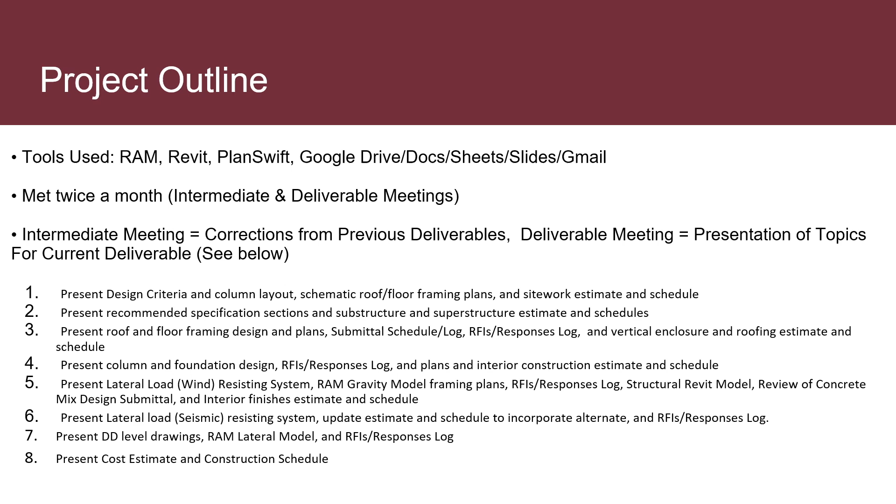Lastly, deliverable 8 consisted of us presenting our cost estimate and construction schedules.

Moving forward, our initial project phases required us to review the given climate summary and design criteria, which provided us with essential information such as various loads, internal pressures, wind speeds, seismic design categories, and a multitude of other factors that must be considered when designing structures such as these.

We reviewed the preliminary drawings we were given, and that helped us develop our initial schematic designs of the roof and floor framing plans and the preliminary foundation system for our respective projects.

Below you'll see some of the things we had to take into account when designing our buildings. This is actually from my team 2, for the hospital in Minnesota. This is a climate summary and a chart of the average high and low temperatures in Minnesota.

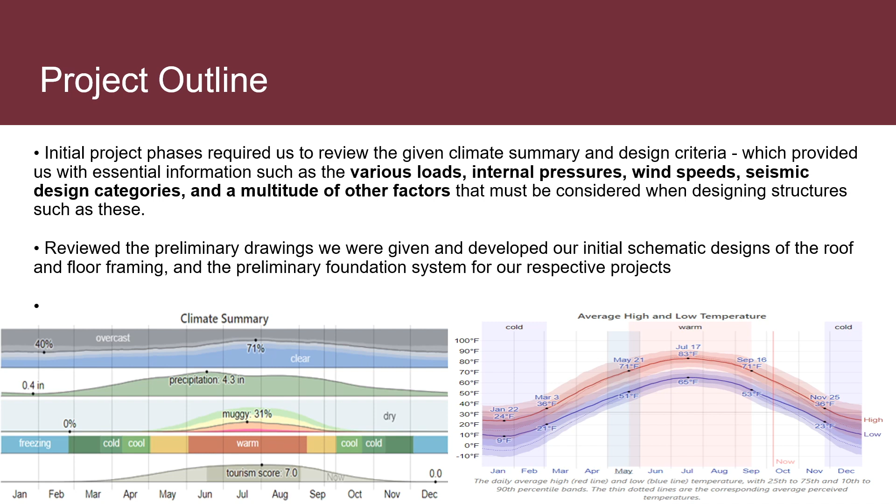This is just a continuation of some of the tasks that we had to keep up with for this project. This included things like RFIs and submittals.

So what an RFI is, it's just an acronym for request for information. It was essentially a tool we used to get clarification on certain aspects of our projects. For example, we might have needed to know how thick we needed to design a slab, or how the thickness changed depending on what floor we were on. We would have to submit an RFI for information like that.

Next, we developed our base and eventually our alternate project estimates and schedules. We then provided our structural steel specifications and our calculations for the roof and floor structural steel sections and our structural columns and footings, which were adjusted as needed throughout the entire project.

We then provided lateral framing and main wind force resisting system, or MWFRS, calculations, and designed our 3D RAM and Revit models, with our seismic force resisting system selection being last.

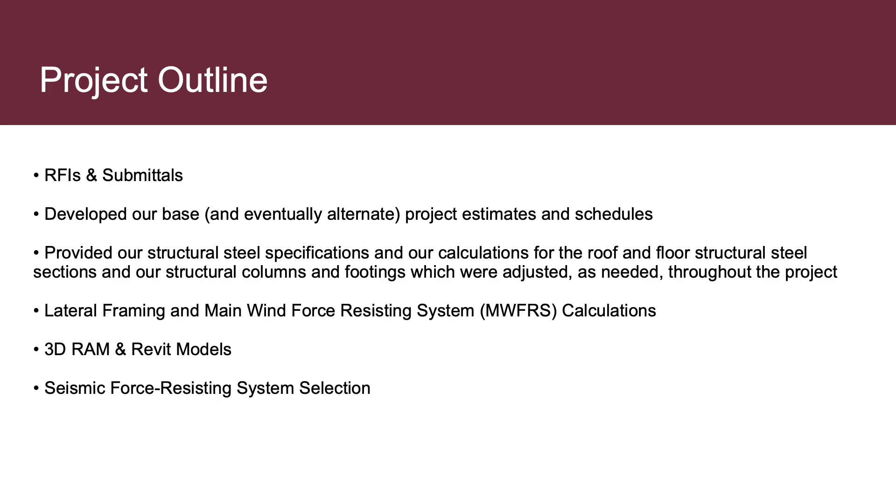Right off the bat, you're going to notice the dead loads. Minnesota has a significantly higher dead load than the rest. It's based on the snow load and the wind exposure of where the building is. Missouri obviously isn't going to have a whole bunch of snow, so the dead load for the floor and roof isn't going to be as much.

You can see the snow load corresponds with where the building is and how much snow they're going to receive per year. Corresponding with the snow load is going to be the snow exposure factor. This is based on if the structure is sheltered or fully exposed, and none of these are sheltered, so they're going to have a 0.9.

Depending on what's going on in the building, this is going to affect the floor live loads. You're going to have a lot of movement going on in an elementary school and an office as opposed to a college classroom. Then the roof live load - everybody chose 20 PSF because that's the minimal requirement for the building.

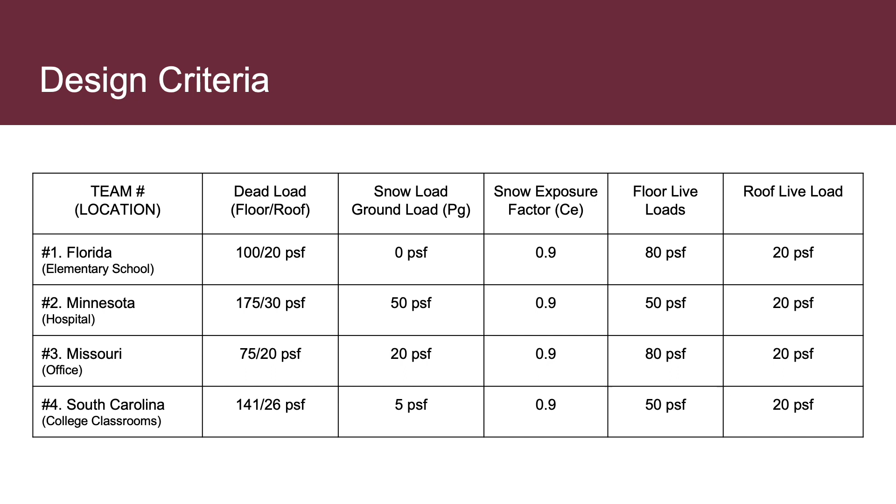Next, we'll get into ultimate wind speed. Based on where the building is, it's going to depend on your wind speed. Florida is obviously going to have a very high one during hurricane season. Same for South Carolina. Minnesota and Missouri are going to have a moderate speed based on snow and blizzard factors. The terrain exposure - everybody's going to have a Category C, very open terrain.

The seismic importance factor is based on the risk category. Risk Category 1 is not a very high occupancy; Risk Categories 3 and 4, with 3 being high occupancy for the elementary school, so they're going to have a 1.25, and Minnesota being a hospital, that's an essential facility, so they get the highest.

And then lastly, we're getting into seismic design category, A through D. A being minimal ground shaking, B being moderate, C being moderate to severe, and D obviously being severe ground shaking due to earthquakes.

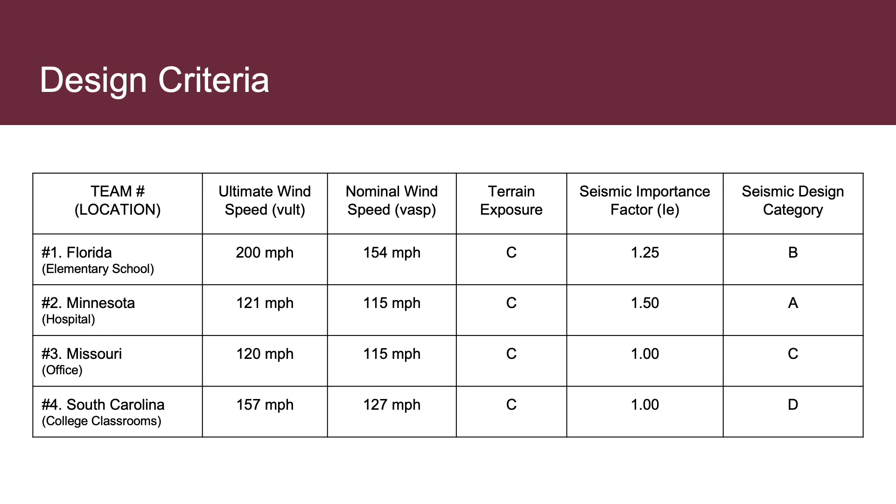So now we're going to talk about beam design. For the beam design, what was required was to know the shear capacity and moment capacity of the beams. Moment of inertia was also checked to prevent exceeding deflection limits.

The maximum deflection limits were determined for the dead and live load combined by taking the length of the beam divided by 240, and for the live load, the length of the beam divided by 360.

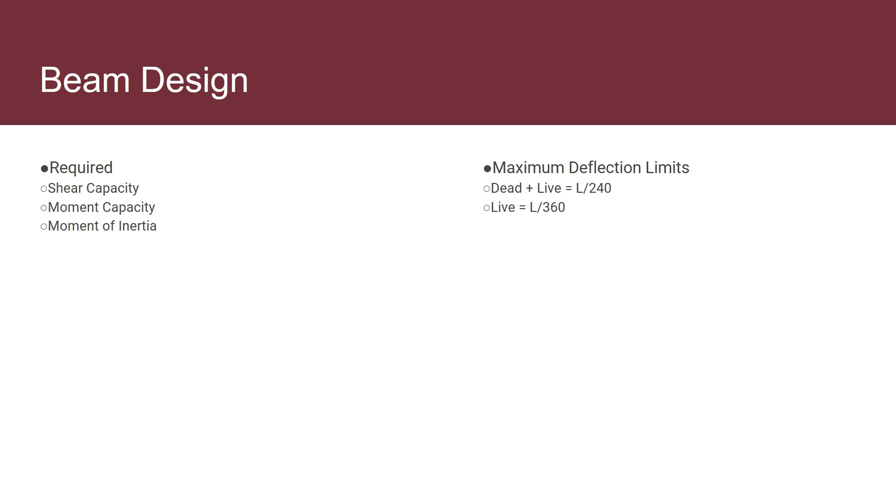These are the applied loads. Obviously, they range a bit, with Minnesota having the highest floor dead load of 175, with Missouri being the lowest floor dead load of 75. The live loads range from 50 to 80, rotating between the locations.

These floor loads were different based on what the building is used for. Minnesota was a hospital, Missouri was an office building, so obviously those vary greatly in the dead load, with hospitals having lots of heavy equipment and office buildings not having such heavy equipment.

South Carolina and Florida: Florida was used for an elementary school, South Carolina for college classrooms. Obviously they're going to be a little higher than just an office building, with lots more people and furniture. Live loads vary greatly as well.

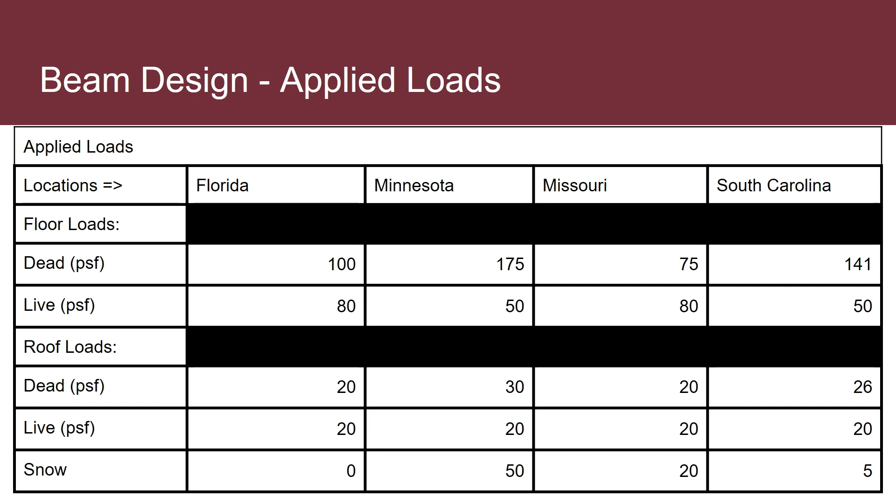For the roof loads, they range from 20 to 30 for both the dead and live loads. For the geographical locations, the snow loads vary a lot. Obviously, you're not going to have snow in Florida, and rarely, if ever, in South Carolina. So Missouri and Minnesota really only have the applicable snow loads that would affect the design at all.

So for the beam design, we took those applied loads and applied them to the schematic designs. Earlier in the design process, each group was told to design the building and do a rough layout, laying out bays, girders, and beams.

Most of us used the plans and just took a pen and drew over them. But these bays varied in size, so the girders and beams were different for each group, and the lengths changed a bit. It really all depended on what that group felt was best for their location. But these differences affect the types of steel that we have.

So the applied loads and schematic designs were used to come up with the moment capacity and the shear capacity. These numbers were taken to the AISC steel manual, where they were compared to the list of beams in the tables, and we chose the most economical steel member for our building, or each group did for theirs.

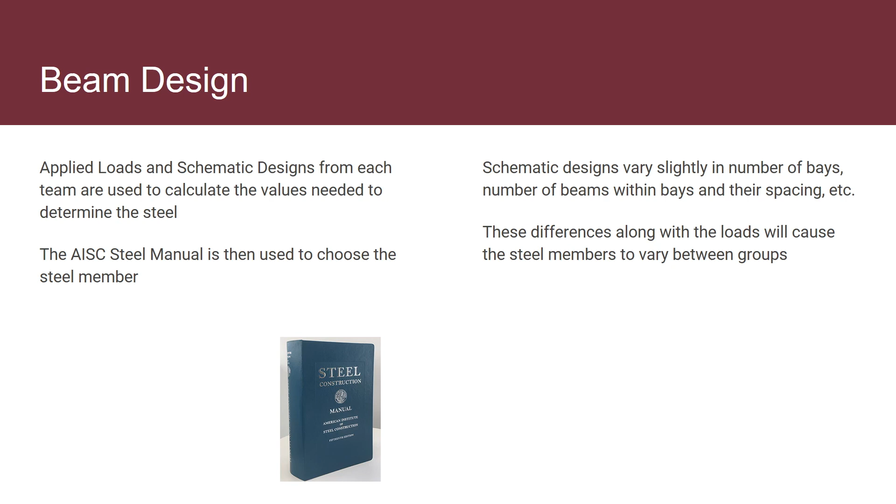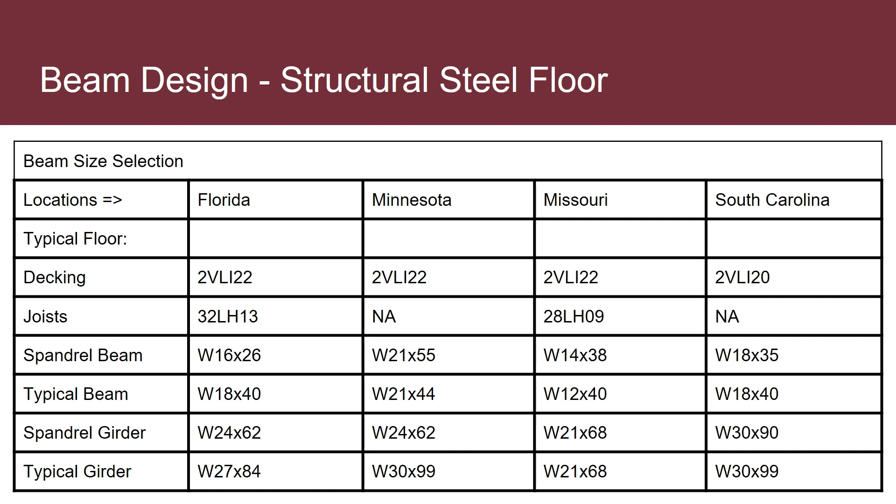And these were all the finalized steel members. They were run against a RAM model, which we'll discuss later, but the RAM model either confirmed or denied our calculations for our steel. If they did happen to vary, hand calculations were redone and retested with the RAM model until the lateral and gravity models passed and approved of our steel choices. But these were the final steel options.

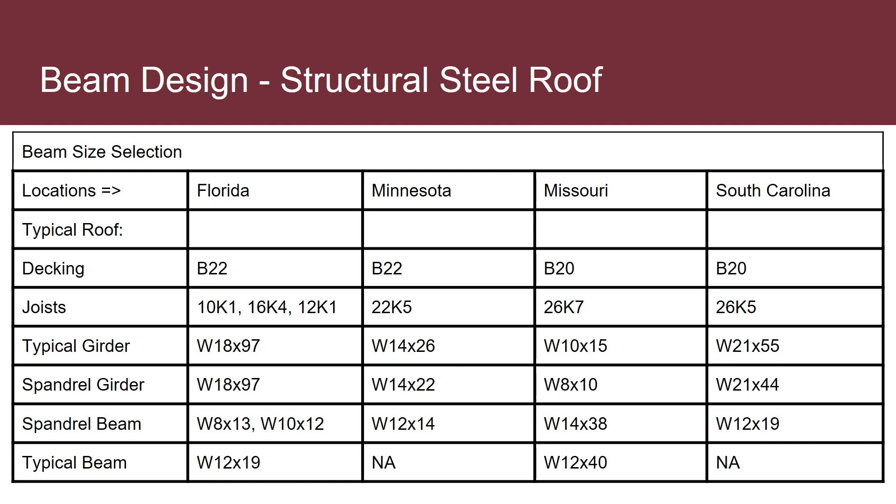Column design basically depends on column loading, and that is based on dead and live loads, and dead and live loads could differ with the building used. In our case, we got 4 types of buildings.

It's elementary school, hospital, offices, and college classrooms. When talking about the axial loading, it includes floor, roof, and wall loads. Determination of column sizes depends on maximum loading that occurs in the column. And when doing column splice, it basically depends on the strength and the cross-sectional area of the steel.

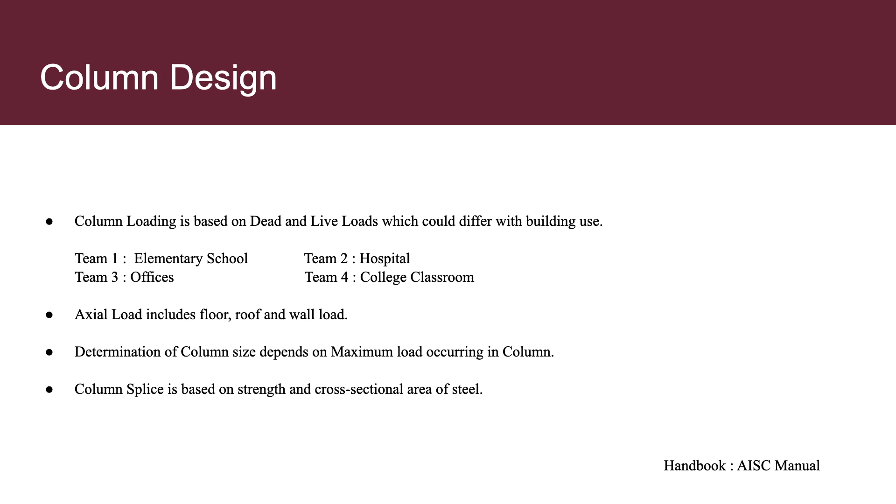What is a column splice? The column splice is basically joining of 2 parts of a column, so the forces and the moments could be transferred from one part to another. We'll be using 2 terms in the last table: top and bottom. When we say top, it means the section above the splice, and when we say bottom, it means the section below the splice. Here is a picture of the splice.

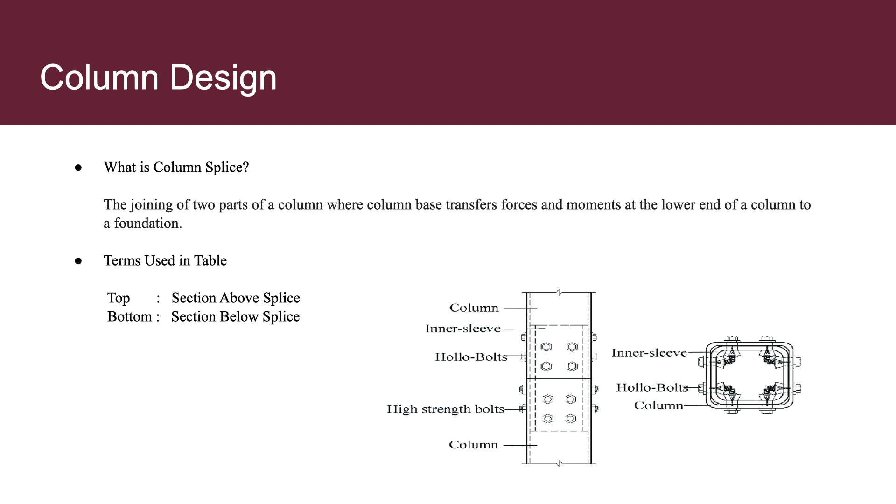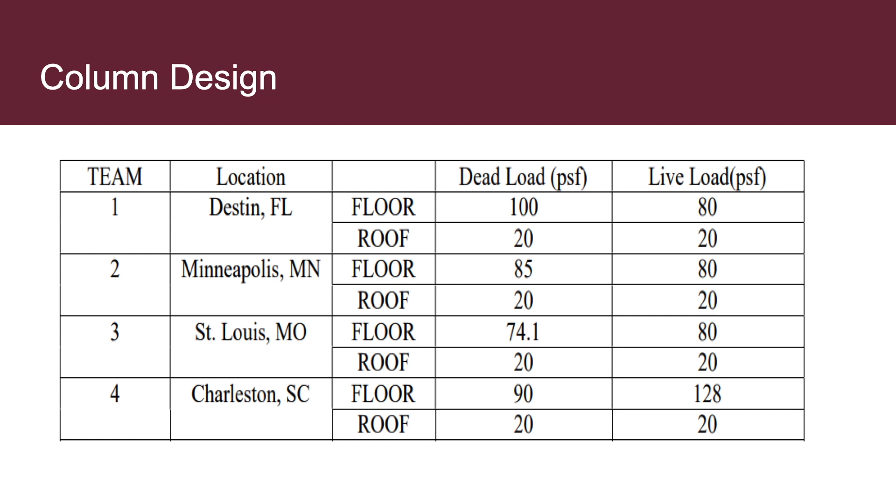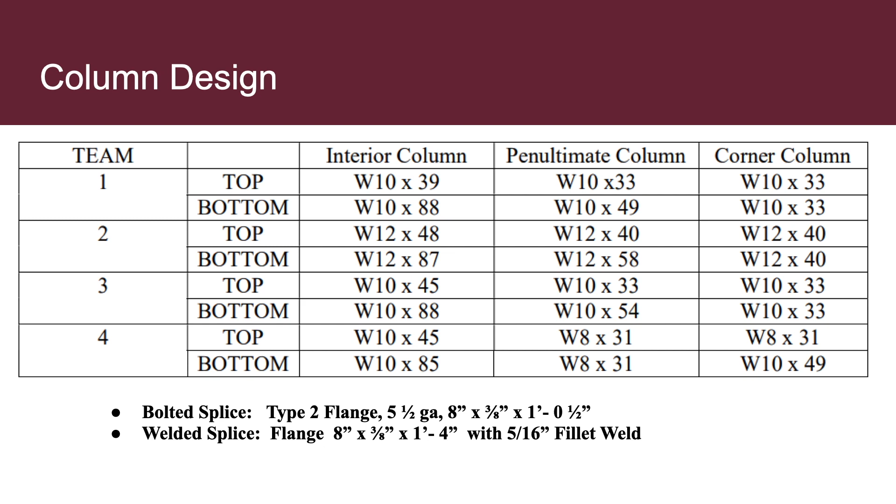Here we got a table that shows us interior, penultimate, and corner size of the column for top and bottom both. And at the bottom we got the size of splices, both bolted and welded.

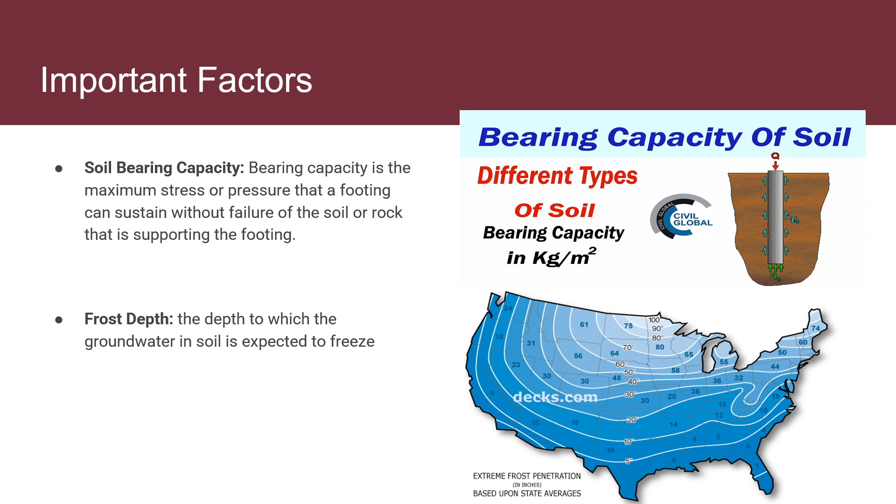If we look over here to our right, we can see that the locations in the southern part of the United States, such as our Florida location and the South Carolina one, are going to have a much lower or much shallower frost depth than, say, the location in Minnesota.

When we look at these 2 factors and compare our results, you can see that Minnesota, which has the strongest soil bearing capacity and the most deep frost depth, is going to have the smallest area when we look at our foundation size. In conjunction with that, South Carolina, having the weakest soil and the most shallow frost depth, is going to have the largest area.

Next, we will cover lateral wind design.

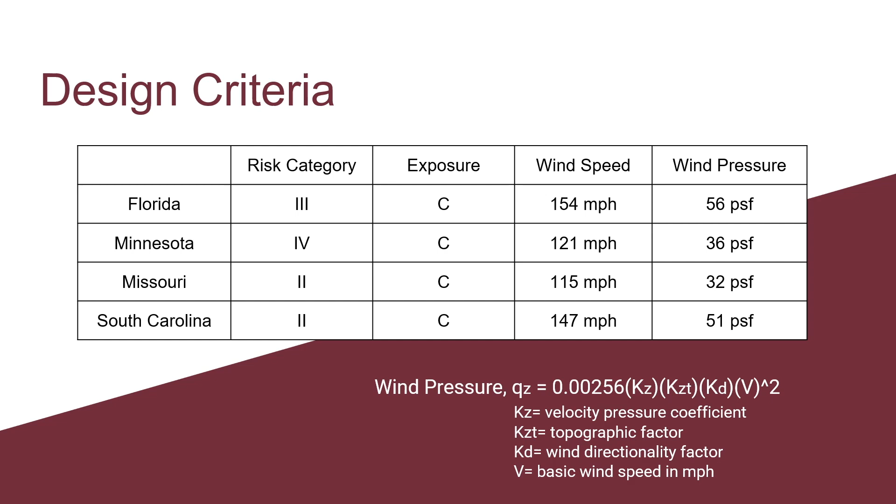With equation 28.3-1, we were able to calculate the wind pressure of the building. Then we used table 28.2-1, which provided a step-by-step procedure to determine the wind load of the building.

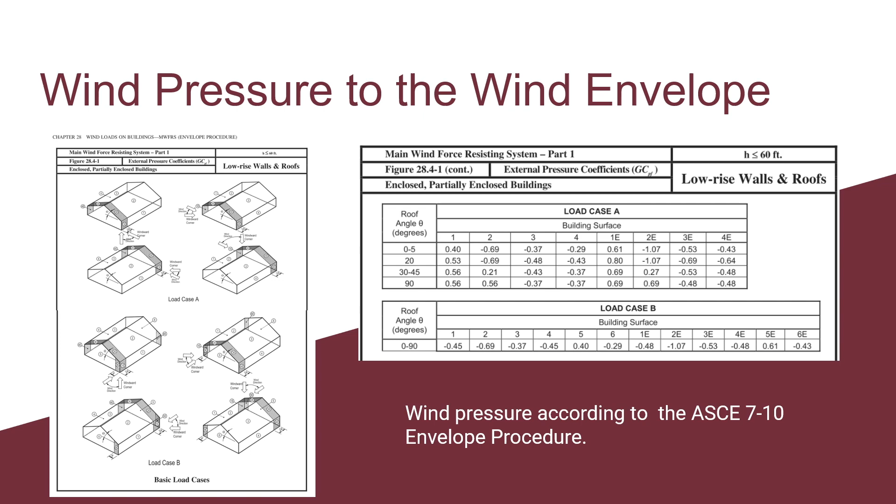The wind load was distributed to the building envelope, and then we calculated the wind pressure on the surface of the building. With the calculated wind pressure, teams were able to calculate the wind story shear by multiplying the wind pressure times half of the height of the wall above the diaphragm plus half of the height of the wall below the diaphragm, leaving the force in pounds per linear foot.

The force was distributed to the horizontal resisting members, and with the help of the Vulcraft manual, teams were able to analyze if the diaphragm will have the shear capacity to carry the story shear load for each level.

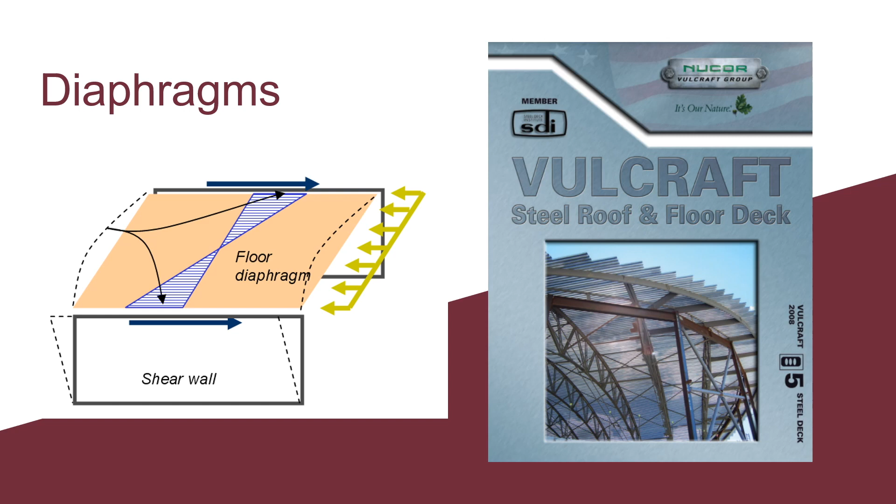The actual wind load acting on the bracing was calculated by multiplying the shear force in each level times the length of the building. This load was applied to the bracing, and with the help of the method of sections, teams were able to design a brace frame using the AISC steel manual.

Braced frames were designed for strength. Each team chose a different type of bracing solely for aesthetic and functional purposes. Now, we will be talking about lateral seismic design.

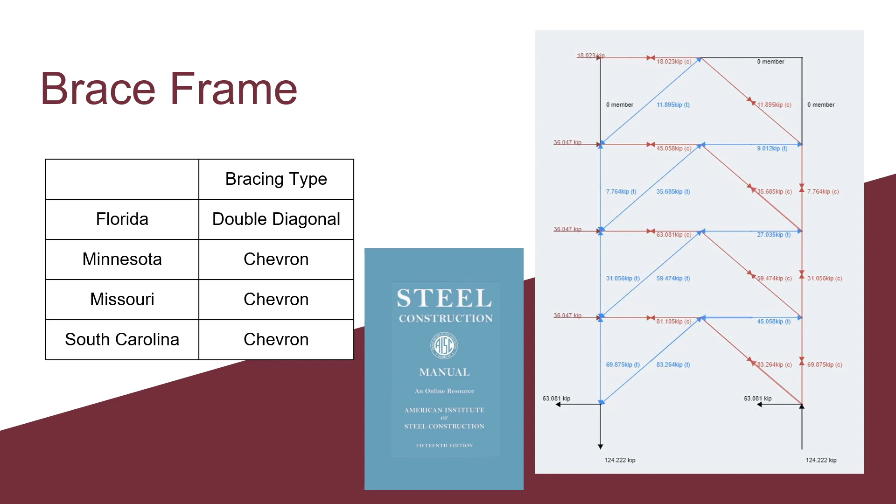Thank you, Josue, for introducing lateral design with your discussion of wind loadings. Hi, I'm Virginia Lance, and I'm responsible for the discussion of the seismic portion of the lateral design.

I chose this topic because of a fascination with the movement of the Earth and geology in general. It's because of this interest that I am impressed with humanity's ability to create sustainable and long-lasting structures which are able to withstand the forces generated by the Earth. Between the wind and seismic lateral loadings, seismic actually drove the design for 3 out of 4 of the locations, and we'll take a look at why this is so.

The lateral seismic loading is determined by the computation of the base shear V, represented here in kips. Several factors are used to determine the base shear, among them the site class, the SDS factor, the seismic design category, the seismic importance factor, and the response modification coefficient, R.

Of these factors, all but the importance factor are based on the movement of the Earth. The importance factor is solely based on the building use, which is defined by the risk category seen here.

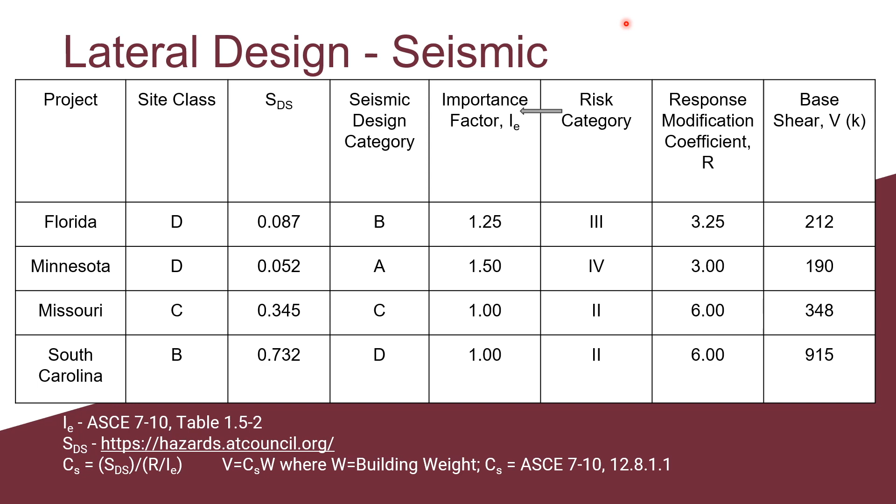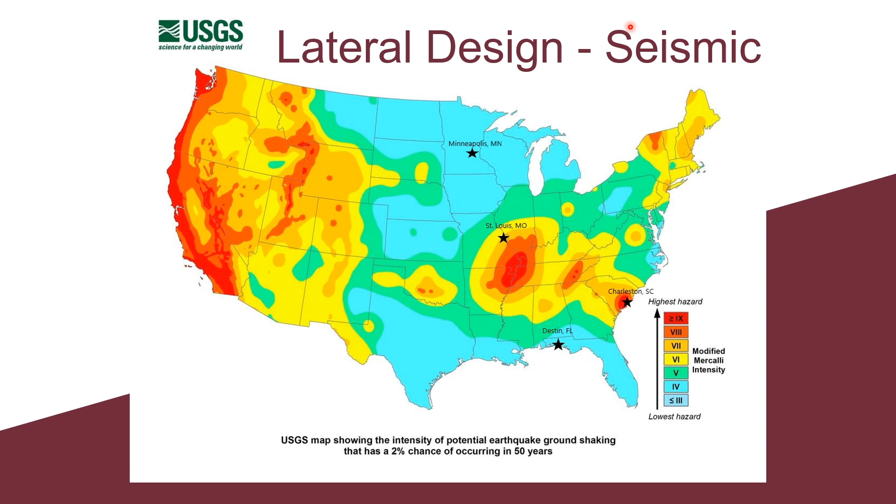Interestingly, as we will discuss, it is the movement of the Earth that determines the base shear and not the risk category of the building.

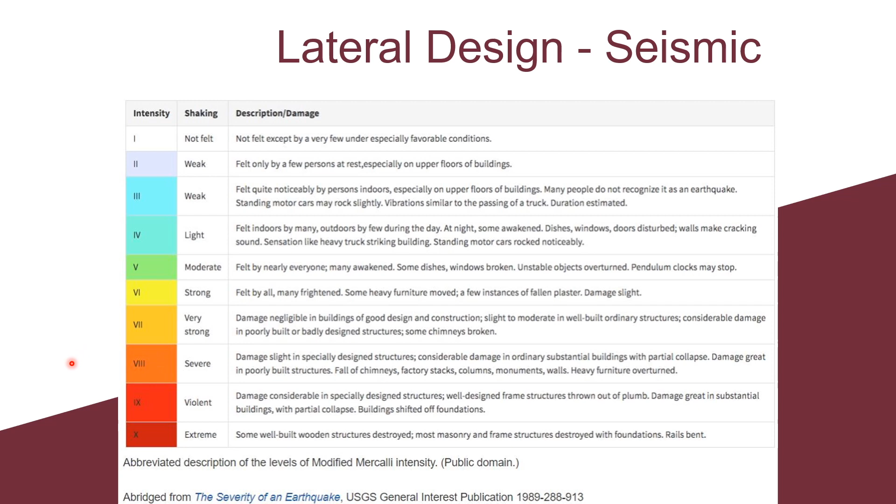This chart shows the color coding of the map, which indicates the intensity of shaking that could potentially be felt in the corresponding regions. Minneapolis and Destin are in regions where shaking is the weakest, while St. Louis would experience severe shaking, and then Charleston would experience violent shaking.

Now, comparing the previous map to our data, you can see that the wider range of values represented by those movement factors in comparison to the importance factors generates a much greater impact on the base shear than the importance factor does. For example, Charleston's college classroom is merely a risk category 2, yielding an importance factor of 1, which generates 0 effect on the value of the base shear, which is 915 kips, the strongest base shear, because it has the highest SDS value and the highest R value.

And consequently, it would require the strongest lateral reinforcement.

Conversely, the hospital in Minneapolis has a risk category 4, generating the highest importance factor of 1.5, yet it shows the lowest base shear of 190 kips due to its position in a low seismic activity region.

Another interesting thing to note is that the elementary school in Destin and the college classroom in Charleston are both coastal cities and both may experience hurricanes. Yet Charleston's design is driven by the seismic portion of the lateral computation instead of the wind because of its seismic location. A hurricane cannot even compete with the movement that Charleston may experience in the event of an earthquake.

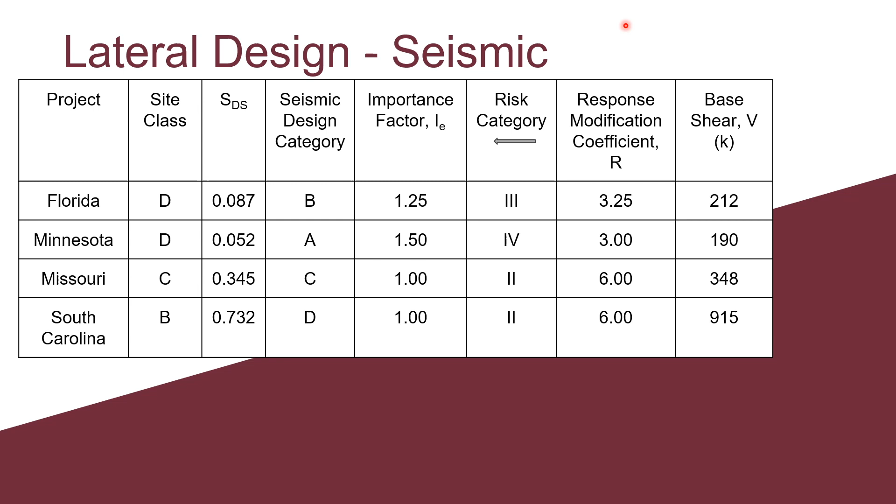I think that gives us an idea of how powerful the earth is.

Determining which section of the code that the building needed to comply with was one of the greatest challenges of this project. As you can see, section 11.4 referred us to section 11.7, which in turn referred us to section 1.4. The code is quite thorough with respect to attempting to address as many different scenarios as possible, but this also makes it a very time-consuming document to track through.

This is one of the factors that made this project a taste of the real-world application of all that we have learned. It was an extremely educational experience, and I'm very thankful for the opportunity.

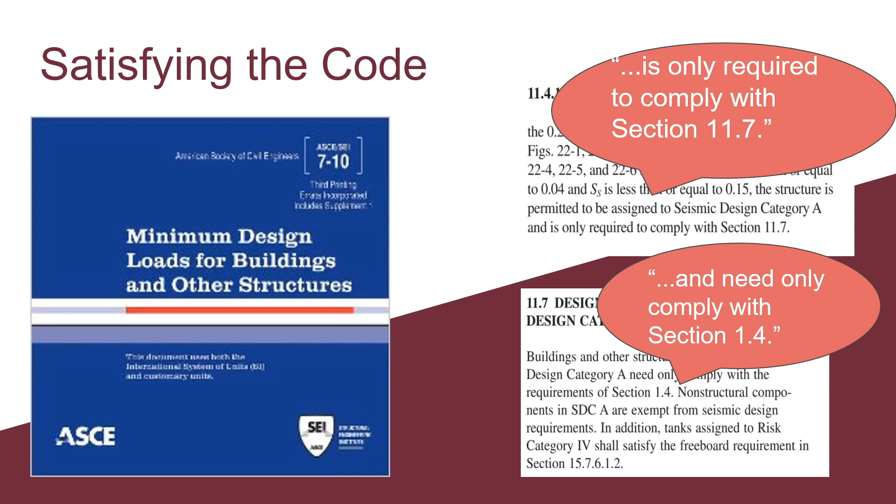Next up, Mohammed will discuss specs, submittals, and RFIs. Thanks, this is Mohammed Ratibi. I will talk about specs, submittal, and request for information.

Specification. We were tasked with going through the CSI MasterFormat and choosing all of the subdivisions using our building.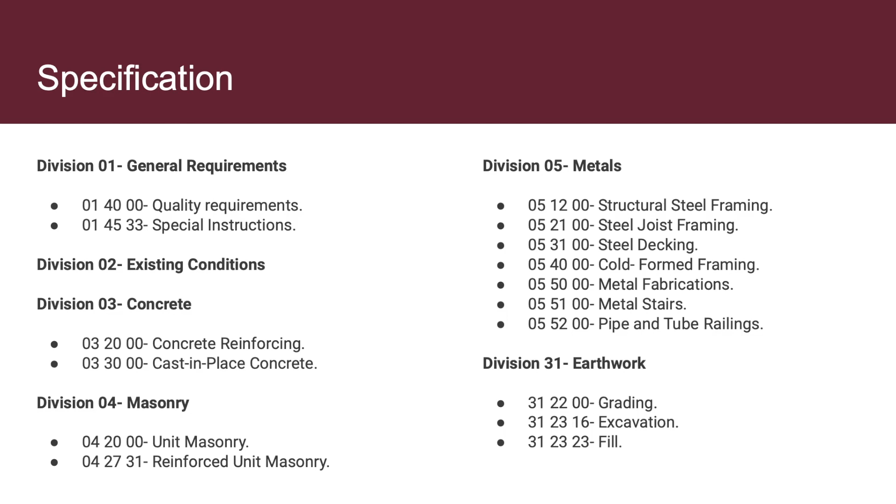Submittal log. We were given the task of filling out a submittal log. It's a document created as a tracking mechanism to ensure that the designing team approve all the materials and the final design before installing.

We were given a different specifications section. Each group was responsible for cataloging the information included in each area and then determining the appropriate data needed to be submitted and reviewed by all involved parties.

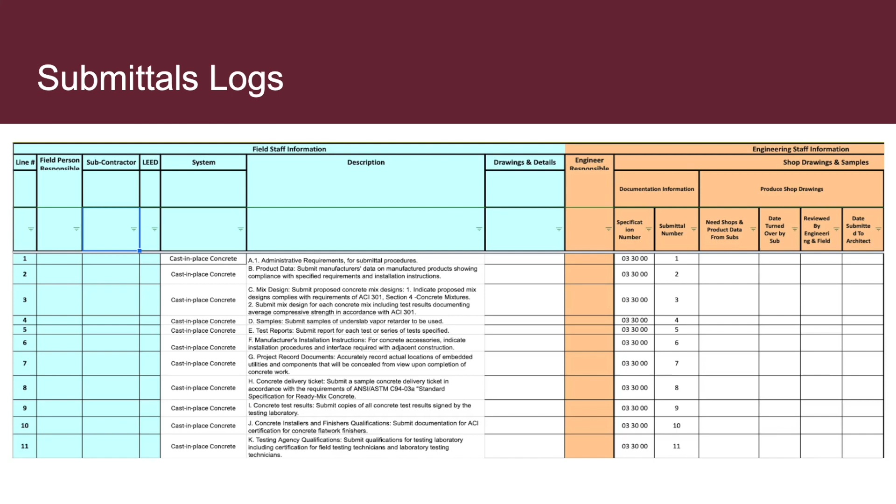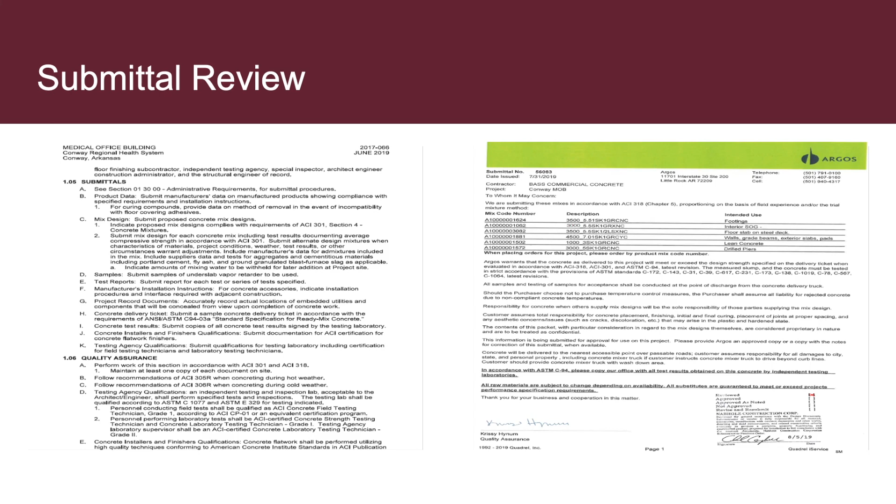Submittal review. The team was given a concrete specifications sheet and a different concrete product sheet for a potential product. We were asked to go through both and see if the product data meets the specs requirement. This was then logged in the submittal review log.

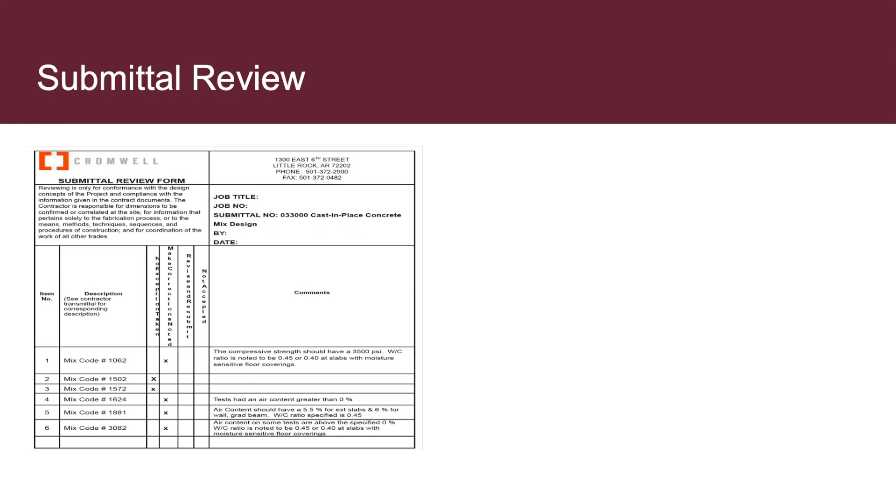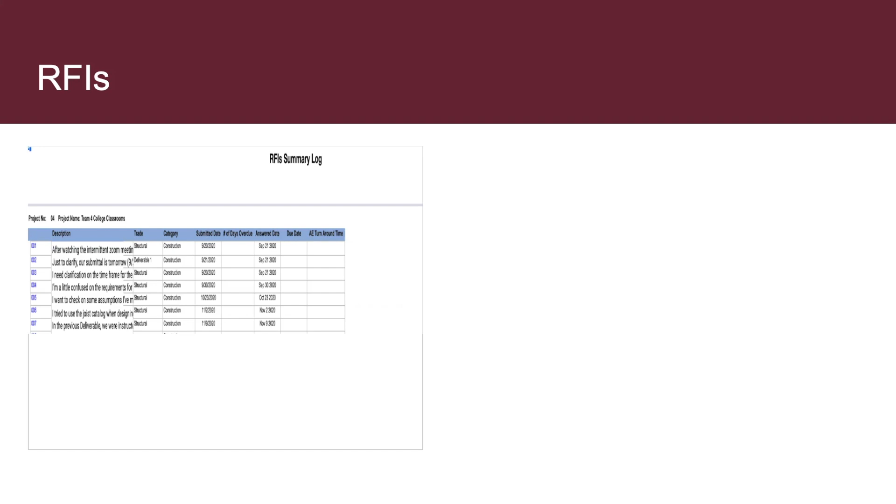Next, we will talk about the base estimate. Hello, my name is Justin Mitchell, and I'm going to be covering the base estimate.

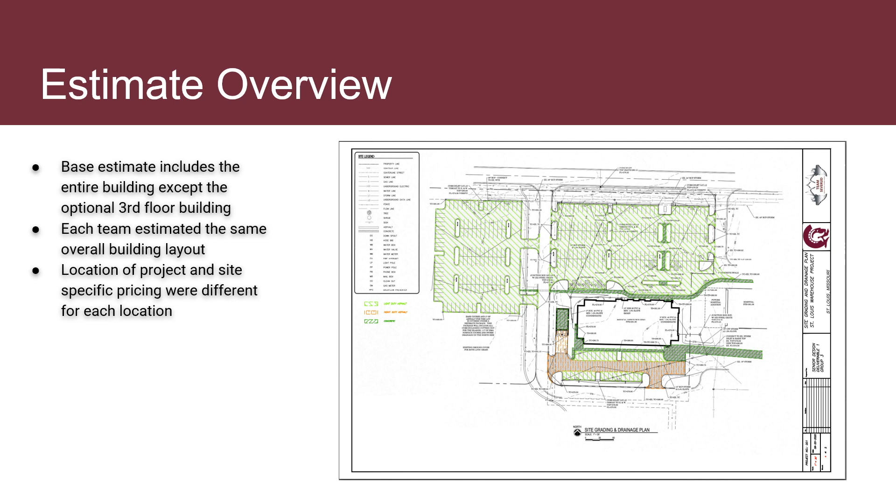The base estimate is the entire estimate except for the alternate third floor estimate, which will be covered on a later slide by Jesus. For this estimate, all four teams estimated the same overall building layout. Each team had different locations, which changed the pricing for each item as well as the structural requirements.

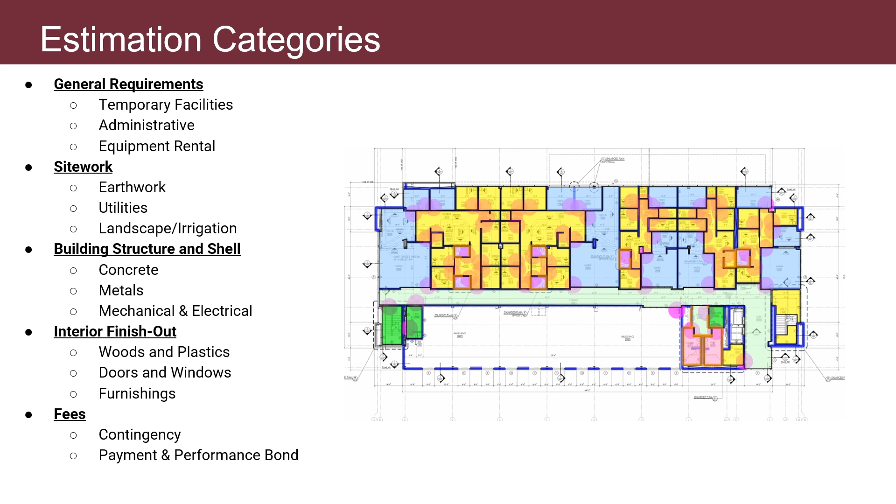For the estimation categories, we received a template from the industry sponsors at CDI. They had different categories like general requirements, which included temporary facilities such as job trailers, admin, which covered all personnel costs for staffing the project, and equipment rental. There was site work, including earthwork, utilities, landscape, and irrigation. There was building structure and shell, which included concrete, metals, and mechanical and electrical costs. There was interior finish, which included woods and plastics, doors and windows, and fees, which included contingency and bonds.

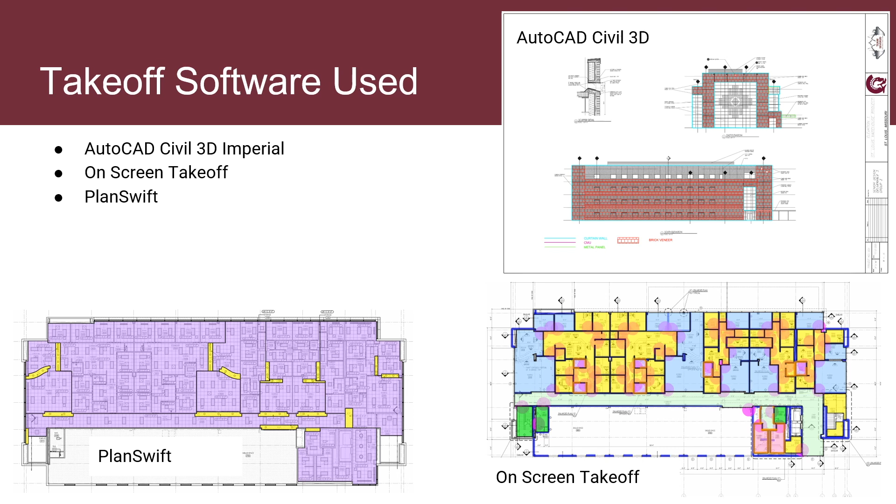For the different takeoff software, each group used different kinds of software based on what they felt comfortable using. We used AutoCAD Civil 3D, On-Screen Takeoff, and PlanSwift.

For the cost estimation software, we all basically used the same software, which was RSMeans Estimation Software by Gordian, as well as industry-sponsored guidance and prior knowledge gained from internships.

For the group comparison, we had two groups around 12.2 million and two groups around 13 million. These differences can be attributed to RSMeans adjustment factors for individual areas of the country, which take into account the price of different materials for each city and adjust the pricing accordingly.

We had different design considerations, like different sizing requirements and different designs such as snow loads and seismic factors. We also had different software used, rounding up or down, varying experience levels, and varying levels of conservativeness.

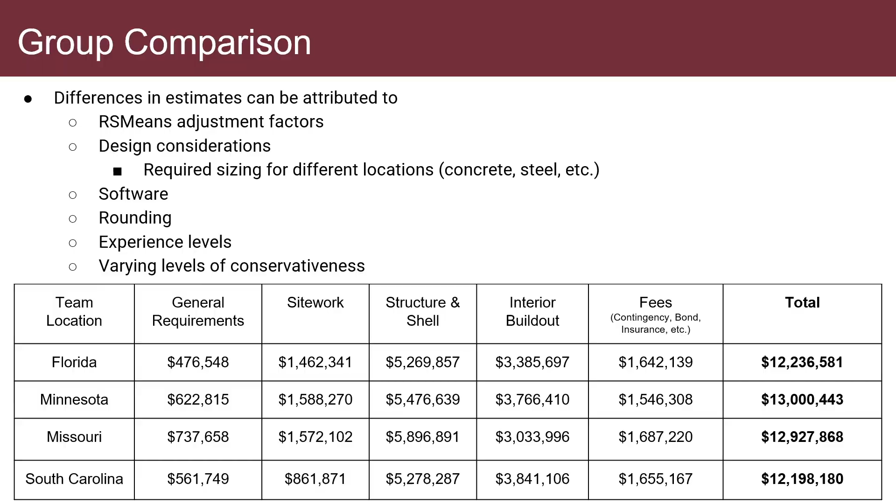Hello everyone, my name is Jesus Martinez, and we're going to be talking about the alternate estimate for the senior design project for the class of 2021 at UALR.

So as Justin previously talked about the takeoff process and the software and the quantification that goes into it, we're going to be adding a bit to that in this alternate.

The alternate entails completing the interior finish out for the north half of the third floor. We're going to look at the third floor plan and reflected ceiling plan in the next slide to see what all is going to be added.

The scope of work we're going to be looking at includes woods and plastics, doors and windows, finishes, miscellaneous specialties, furnishings, and mechanical, electrical, and plumbing systems.

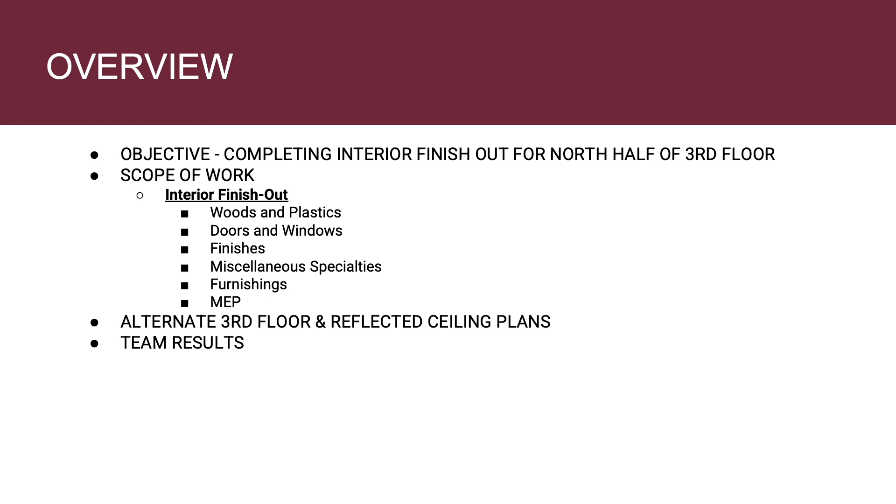So let's look at the alternate third floor plan and the alternate third floor reflected ceiling plan, and then we'll look at all the team results.

On the left side we have the original third floor plan provided to us by the sponsors. We can see the north upper half of the building is pretty empty, just shell space. To the right, in the upper half, we have new rooms, new offices, new restrooms, and next to that the legend showing what those colors mean — new tile, new carpet, porcelain, rubber base, and sheetrock.

At the bottom we have the alternate reflected ceiling plan. We can see that new acoustical ceiling and new gypsum board ceiling are going into a couple of areas where we didn't have anything before. So that's an example of the plans for takeoff.

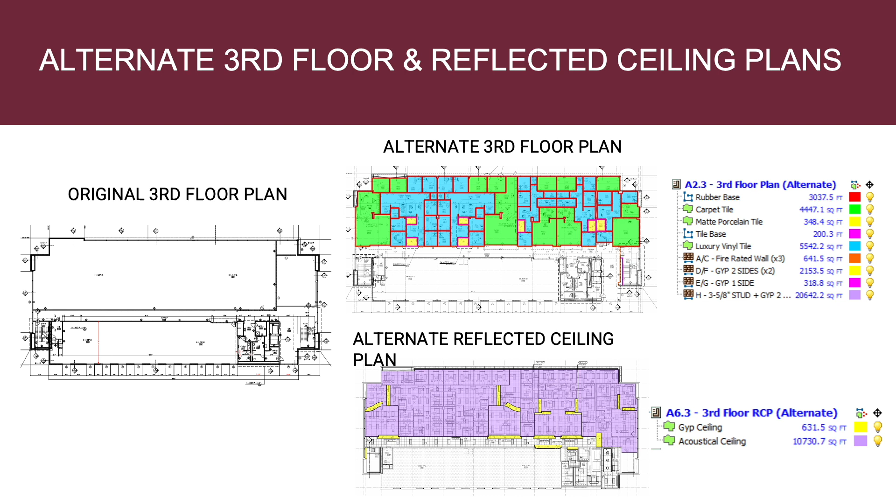Now let's move on to team results. Here we can see all the team results, their location, and a price breakdown of what everybody came out with for general requirements, the interior build out, which was the main thing, and fees, which included contingency, insurance, and bonds.

As Justin mentioned before, disparities come in with pricing based on location. Quantities might differ between teams, and sometimes the price isn't as broken out as we needed it to be. But overall, all teams were in the 2 million range, and the highest was in the 3 million range.

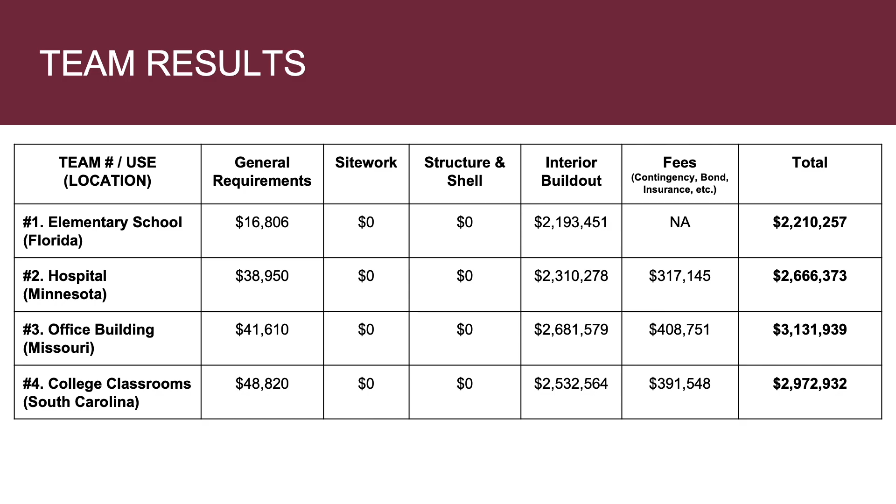Hello, my name is Jeffrey Snorman, and the next thing we're going to look at is the schedule, our base schedule. We used the estimate for the most part to help design our schedule, and then we looked at a lot of different things that went into making it, like where groups were located, different weather conditions, and other things you have to look at in that area.

The software we used in order to make our schedules was Microsoft Project, which allowed us to put different things in as we came across them and link them together into a Gantt chart so we could figure out what activities could be going on at the same time and what couldn't, linking them to figure out the overall duration of our schedule.

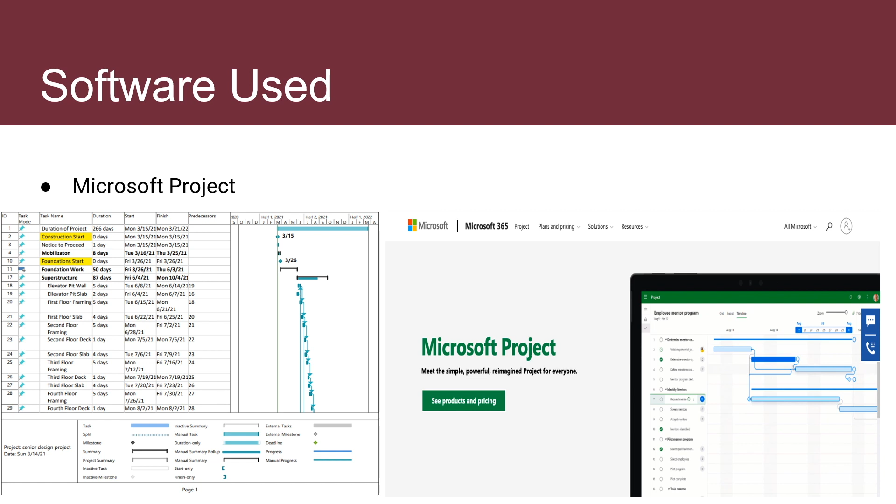The Destin, Florida group had to consider hurricane season for when they were starting and when they wanted to be doing work outside versus inside. Minnesota had to consider winter periods, since they didn't want to be doing work outside during the winter, so you had to wait and start a little later to have most of that done and be working interior work as you get into the winter.

Hi, this is Chris Reyna. I'm presenting the alternate schedule for the project. The alternate schedule was for a project at hand.

We were tasked with providing an alternate estimate for the interior of the third floor. This alternate estimate would need a time frame for the owners, so because of that we created an alternate schedule to figure out how long the duration would be, or if it would extend the project in duration, or if it would decrease it. The software we used to figure this out was Microsoft Project.

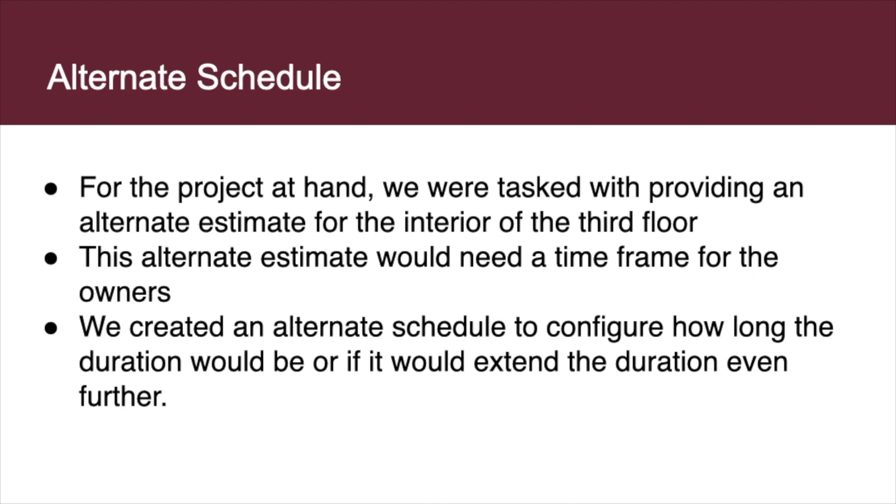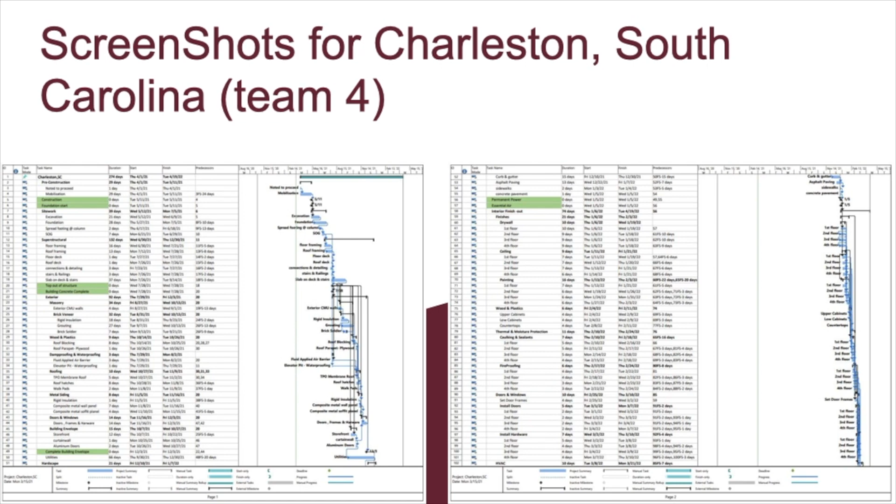The next thing is the screenshots, basically the final touches of what each team provided. Here's the screenshot for Charleston, South Carolina, Team 4. This is their alternate schedule, going hand in hand with their estimate.

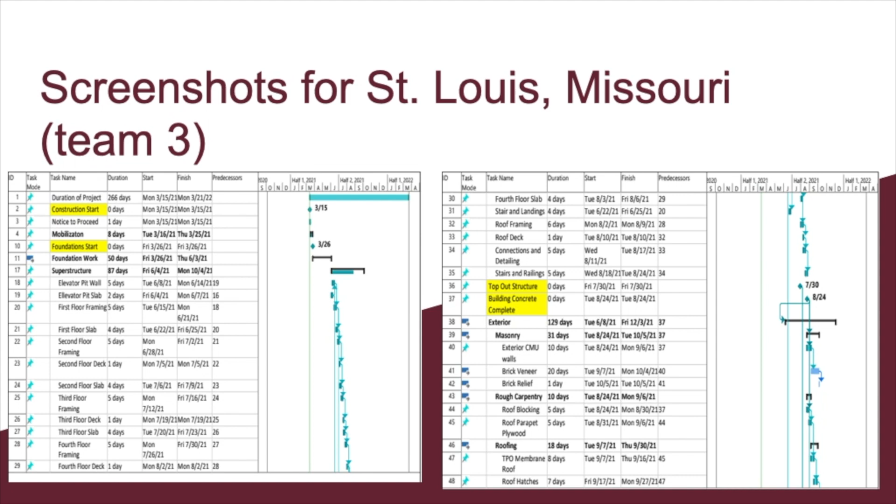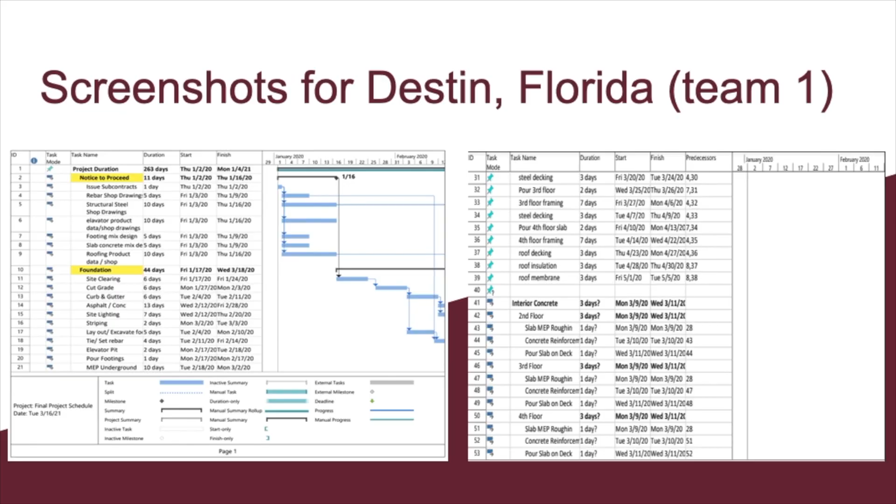The reason we're presenting this is that the durations were very similar, and basically adding the alternate to the project, there would be one month added to the duration of the project. This alternate schedule focused on the interior finishes that are part of the alternate estimate, and this changes other durations that might have a lag into becoming zero extra days.

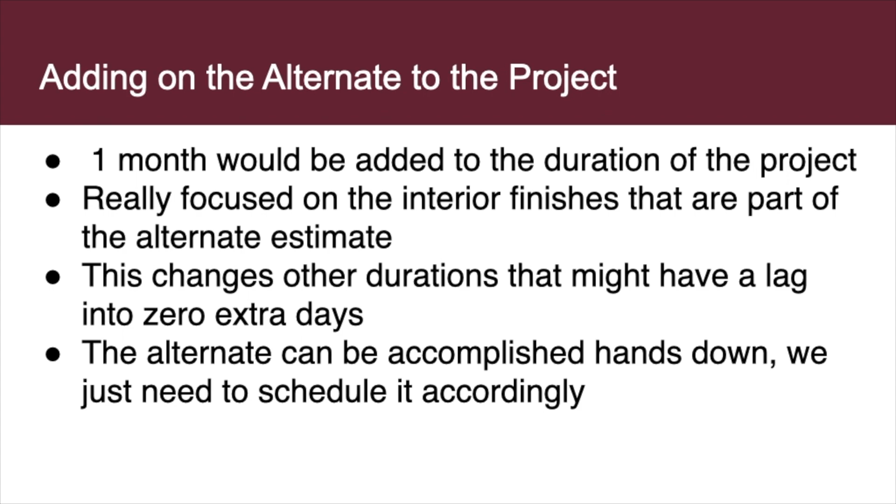Meaning that tasks that can be completed in a certain amount of days and still have extra days in case something comes up would become primary tasks that need to be completed then and there. So the alternate can be accomplished hands down, we just need to schedule it accordingly.

Hello, my name is Jonathan Gentry, and I'll be talking to you about how we students used RAM structural system to model our gravity and lateral models.

So first off, what is RAM structural system? RAM structural system is a structural analysis software made by Bentley for structural engineers in order to streamline the overall design process. It is a program with a simple interface that is fairly easy to learn the basics of, but there is a lot of behind-the-scenes stuff that someone running the program must be aware of in order to get results that are accurate and make sense for the project.

Once you learn the program, it allows engineers to be much more efficient with their time, as it is much quicker than doing hundreds or thousands of manual hand calculations that would otherwise be required to figure out the different member sizes for a large project.

Some of the things that RAM allows users to do is easily input their building geometry and different load data, perform analyses to get appropriate member sizes, and make sure that they adhere to local building codes, as well as export the results into a PDF form that is easy for transmittal or printing purposes.

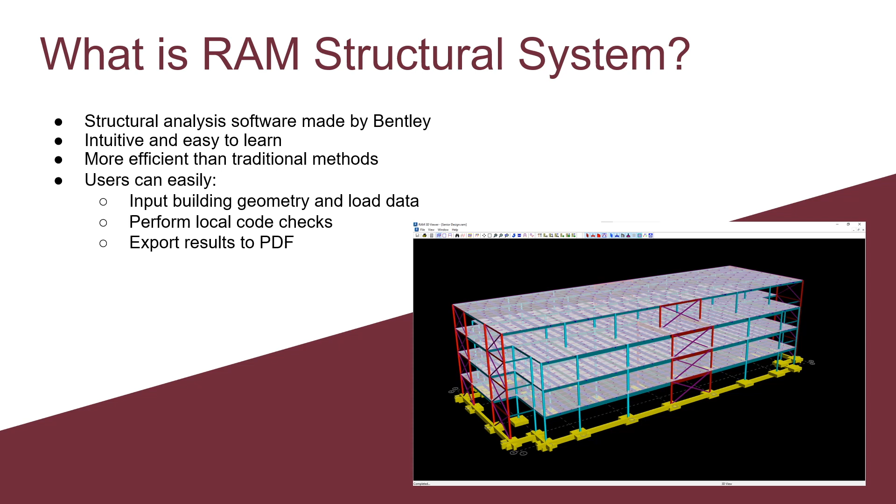As far as the overall design process goes, we were all heavily encouraged to perform our hand calculations first and really understand how we got to those results. This allowed us to have an expectation of what the results from RAM should look like. For the most part, the results that we got from RAM matched our hand calculation results and overall made sense. Now, whenever the results differed greatly, it was usually due to us not understanding a certain aspect of the program, and this is where help from our industry sponsors came in handy.

Whenever we would get an error, it was almost always a simple fix of just changing a variable or a value that you might not think of when doing hand calculations. For instance, this error shown here was brought on because we did not realize that RAM required users to manually input member sizes for its brace frame analysis, because for most other members, it calculates the required member size based on the loading that you input into the model.

So as you can see, understanding the RAM software is very important in order to be able to achieve good results.

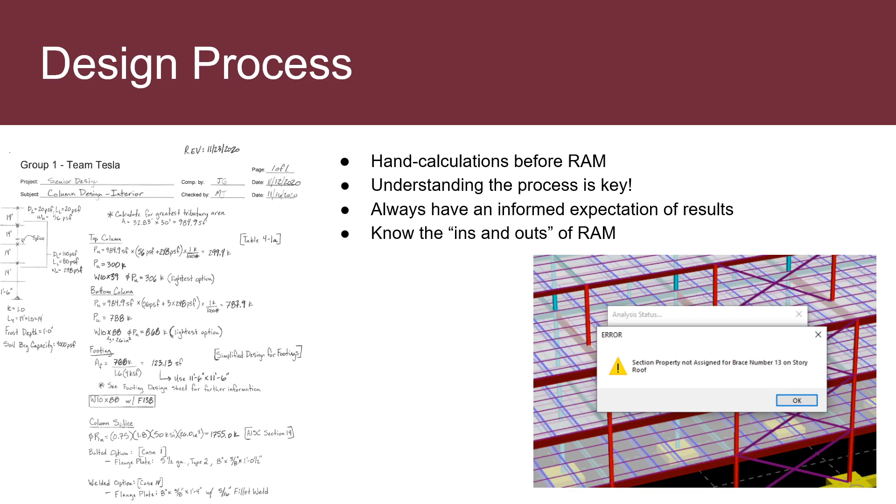Now, while you are able to modify the color scheme if you wish, the default color scheme within RAM is as follows: yellow for all foundation and footing members, cyan for gravity members, red for lateral members, and purple for braced frame members. Also shown in this screenshot are the different floor decking levels, as well as the direction of the span of that decking, which is shown by the small purple arrow lines.

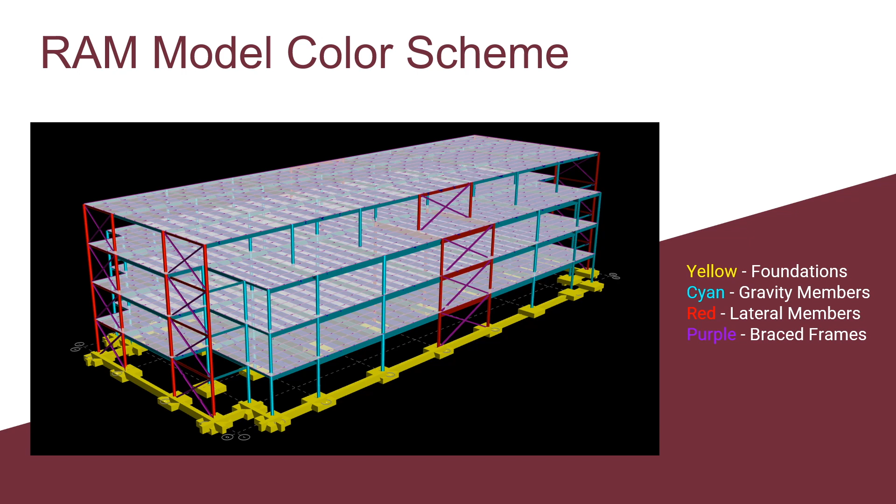The code check is basically the ending step that we were tasked with completing within RAM. After you figure out all of the different member sizes and input them into RAM, or use the sizes that RAM itself assigns, you are able to run a lateral code check.

This uses whatever building codes that you tell it to, and it checks all of the lateral framing members against that code. The results of this code check will basically tell you how much of the overall member capacity is being utilized. It goes on a color scale from dark blue all the way to red, with red indicating that the member has failed.

In this case, the user is able to change the assigned member size and rerun the analysis until that member passes. Now, after all of the members are shown to be passing, we then used all of the member sizes from RAM to build our Revit models that we then used to make up our design and development drawing sets.

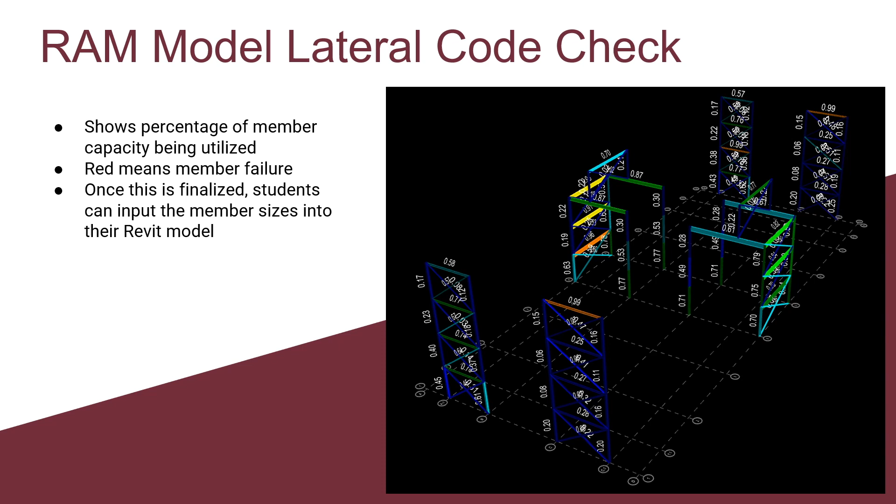Hello, my name is Cami Lambert and I'm going to present to you the drawings and details from our project. We were tasked with developing our drawings and details in the Autodesk software Revit.

We had to develop a complete set of drawings consisting of a general note sheet, foundation plan, floor framing plan, roof framing plan, brace frame elevations plan, and typical details.

In this first sheet we have here is the general note sheet. This sheet contains the summary of our general specifications, which vary for each group.

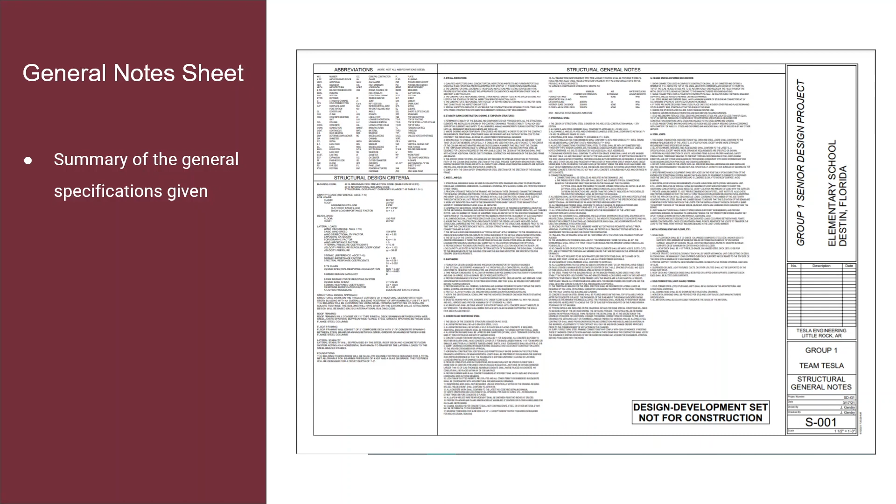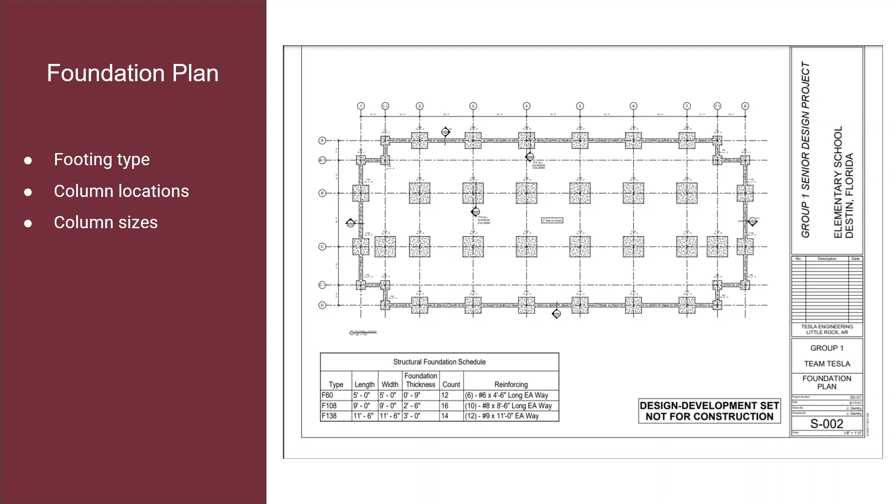The next sheet is our foundation plan. From our foundation plan, you can tell what kind of footing type we use, which was continuous footing. You can also locate the columns used and their sizing. In the bottom left-hand corner of this sheet, you can find a structural foundation schedule to help locate all the components within the drawing.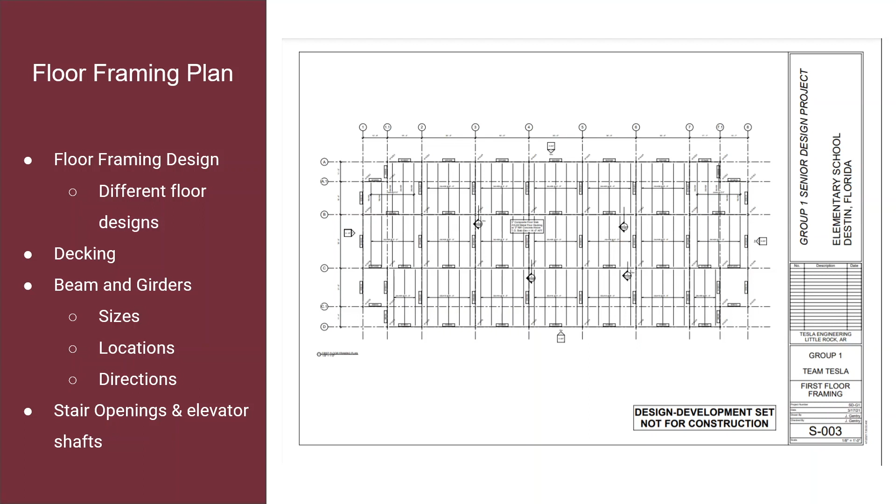The beams and girders can be found on this sheet, as well as the decking, where their sizing and locations are displayed. On the bottom right and left sides of the drawing, you can find where the stair openings and elevator shafts are located.

Now we have the roof framing plan that displays our roof framing designs. Again, like the floor framing plan, the beams and girders can be found here, as well as the decking, where their sizing and locations are displayed.

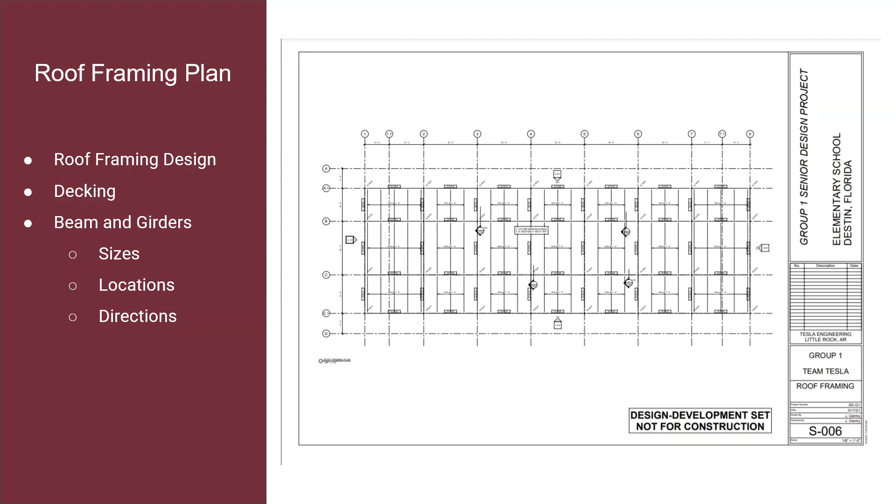Here we have our braced frame elevations. For the bracing design, each group had different designs based on the different design criteria we were given. The braced frame elevations shown on this sheet are from Group 1, who used double diagonal bracing, also known as X bracing. All the other groups used K bracing, also known as inverted V bracing.

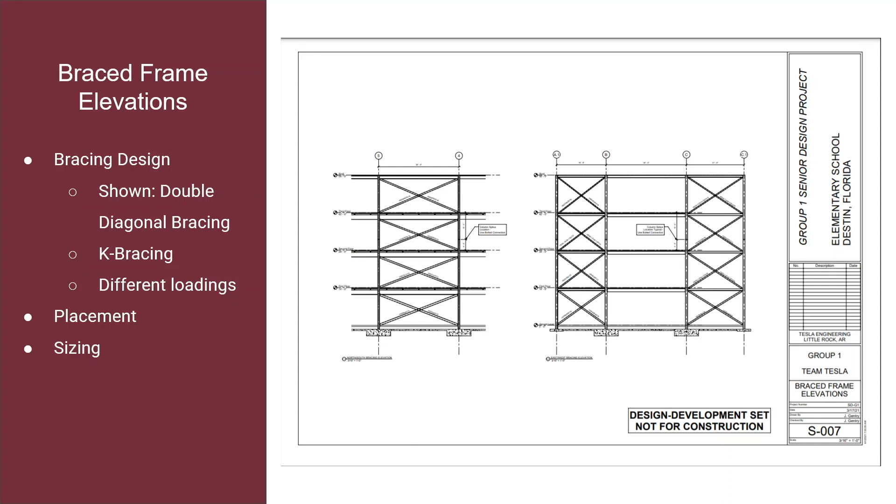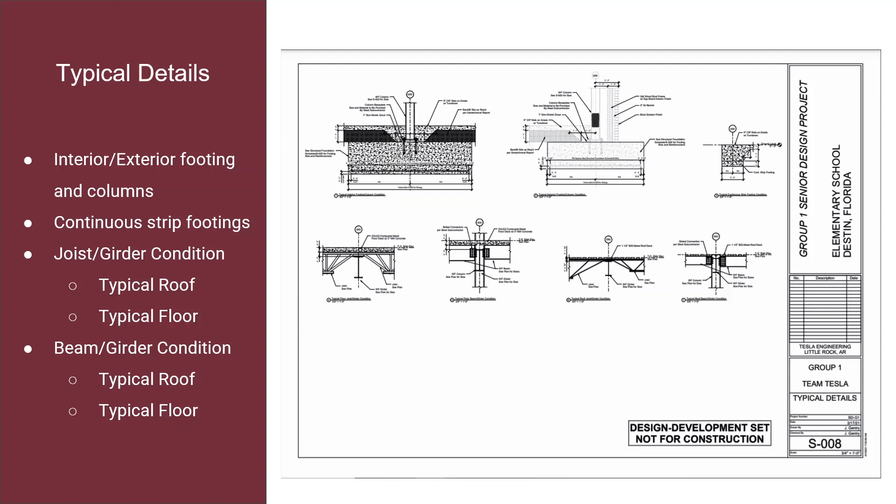In the last sheet we have here, you can find the typical details. There is a detail for interior and exterior footings and columns, a detail of the continuous strip footings, joist and girder conditions for a typical roof and typical floor, and beam and girder conditions for a typical roof and typical floor.

That was our complete drawing set and details, and I'll now hand it over to Jasmine to wrap things up. Hello, my name is Jasmine Ball, and I will be presenting the closing statement.

As some review, there were 2 phases we had to go through to complete our project, and each phase contained 2 deliverables. In deliverable 1, we were to develop design criteria, column layout and framing plans, and develop a site work estimate and schedule. In deliverable 2, we were to select structural specifications and develop a substructure and superstructure estimate and schedule.

In phase 2, we had deliverable 3 and 4, in which we were to design typical roof and framing conditions, develop RFIs and submittal schedules, and develop exterior vertical enclosures and roofing estimate and schedule. In deliverable 4, we were to design columns and footings and develop interior estimate and schedule.

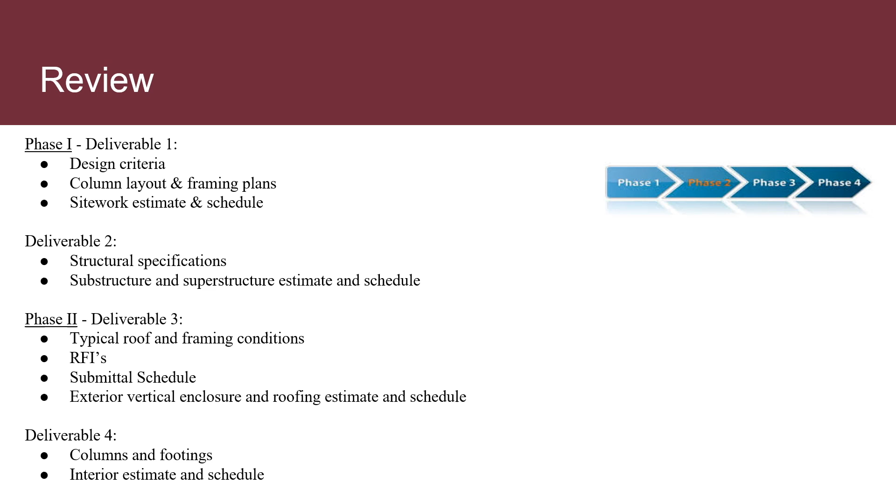Phase 3 contains deliverable 5 and deliverable 6, in which we were to design lateral load resisting system components for wind and develop a RAM and Revit model.

We were to review the concrete mix design submittal and develop an interior estimate and schedule. For deliverable 6, we were to continue to work on our RAM and Revit models, while also incorporating the alternate information for our estimate and schedule.

In phase 4, we had deliverable 7 and deliverable 8. In deliverable 7, we were to design lateral load resisting system components for seismic, develop mechanical, plumbing, and electrical estimate and schedule, develop a general conditions and general requirements estimate, and develop a lateral RAM model.

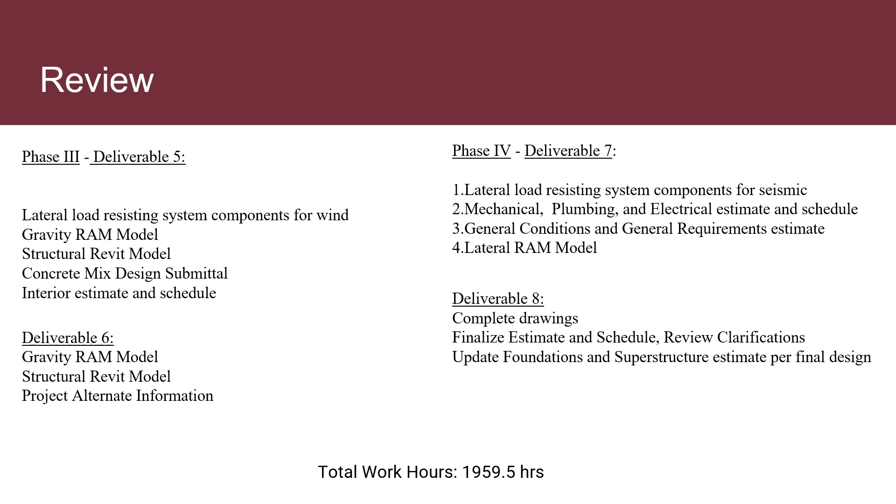In our final deliverable, we were to complete drawings. We were to finalize all prices on estimate and durations on schedule, review clarifications, and update foundations and superstructure estimate per final design. Our total work hours were 1959.5 hours.

There were some different outcomes, mainly from the structural side rather than the estimating side, but those changes were still minute. Estimating changes came from things such as frost depth or adding in a location adjustment factor. But even with these different factors, the final estimate and calculations were within a close range.

As a team, we had to learn not to procrastinate, stay on schedule, and follow the calendar. It is important to you and to everyone to work together so we can provide the best outcome for our projects.

We were also lucky enough to receive real-world experiences that will help us in our future. When we first started our projects, we were unsure we were doing the right things because it was so new, and we had to learn how to trust ourselves and our knowledge, and over time we started gaining confidence and putting our teachings to the test.

There were many hurdles, especially in a team-based environment, that we had to overcome. We had to adapt fast to the new changes. We would have to incorporate new drawings every week and new information, and we had to act fast on that.